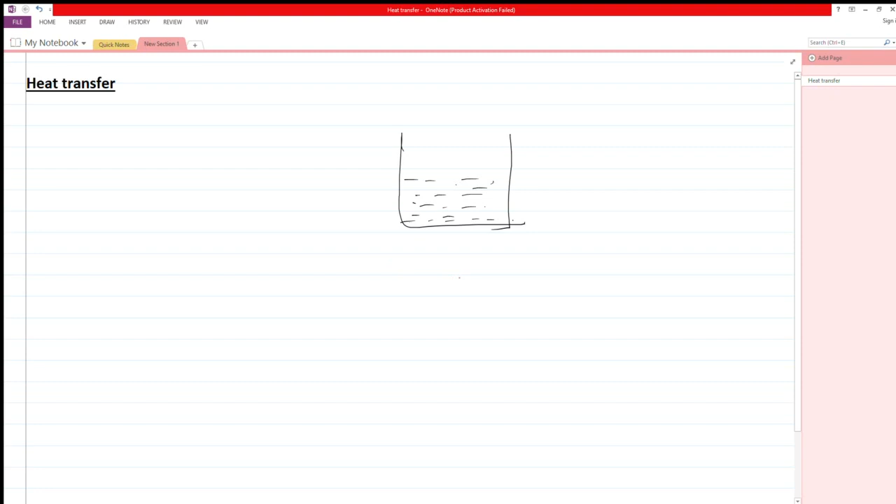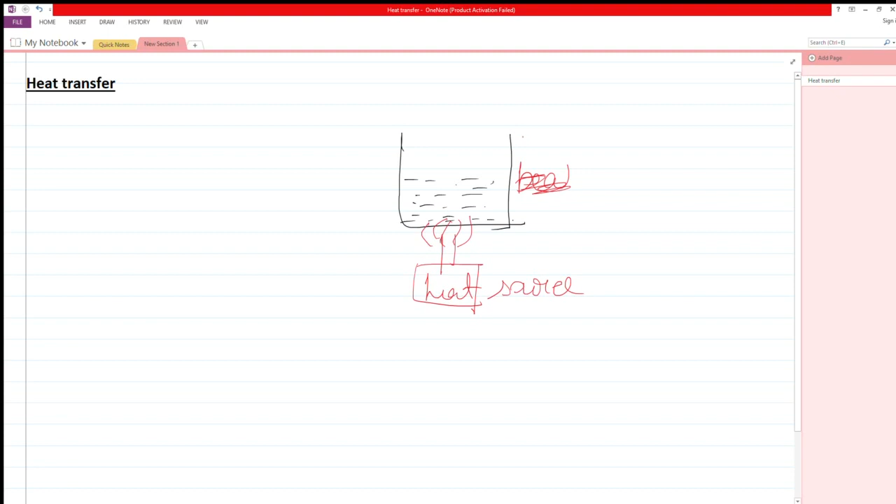And now some flame is there, some heating source we are providing, some flame is coming, some heating source we are providing. This is a heating source, and this is a beaker. Anything you can call it, a container. एक कंटेनर आपने ले लिया और इसके अंदर ये जो है वाटर फिल्ड है.

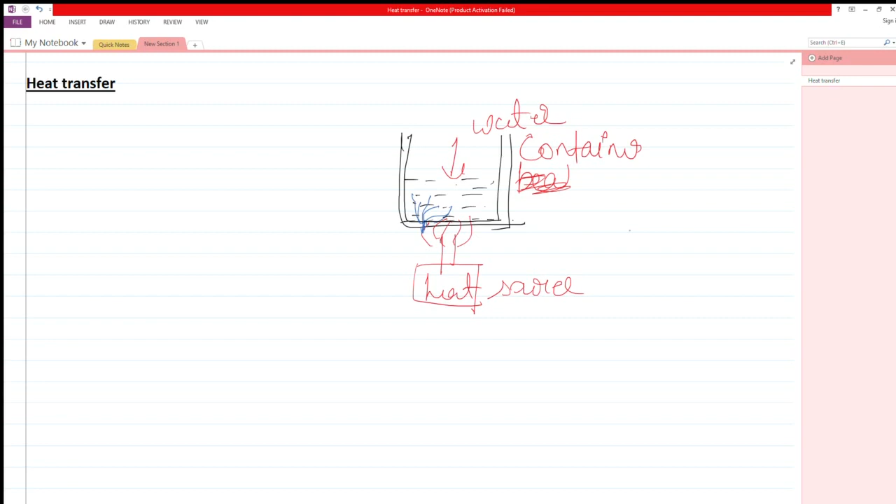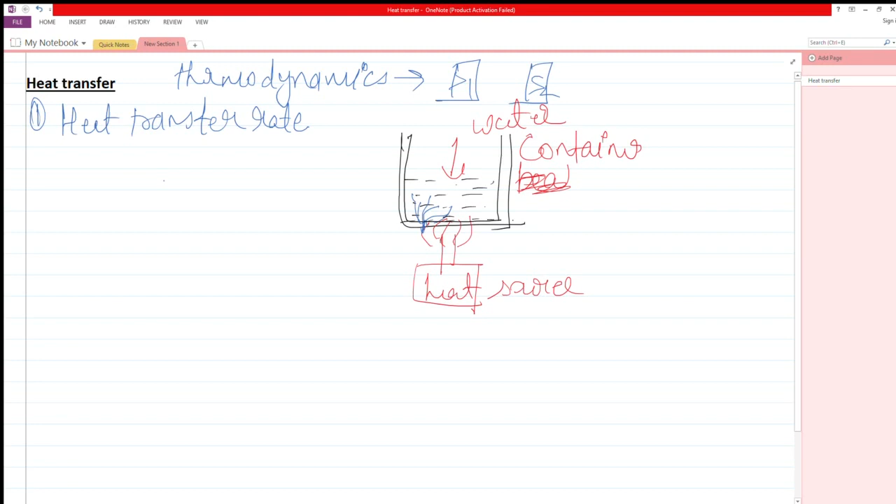Heat transfer rate. The word heat you have already studied previously in a subject called thermodynamics. Thermodynamics में भी आपने heat को पढ़ा है. In that subject you used to study what is heat and how much amount of heat is being transferred from one system to another system, from system 1 to system 2, or from system to surrounding. But now in the case of heat transfer subject, you will be studying at what rate the heat transfer is taking place. So this is the basic difference between the heat transfer and the thermodynamics.

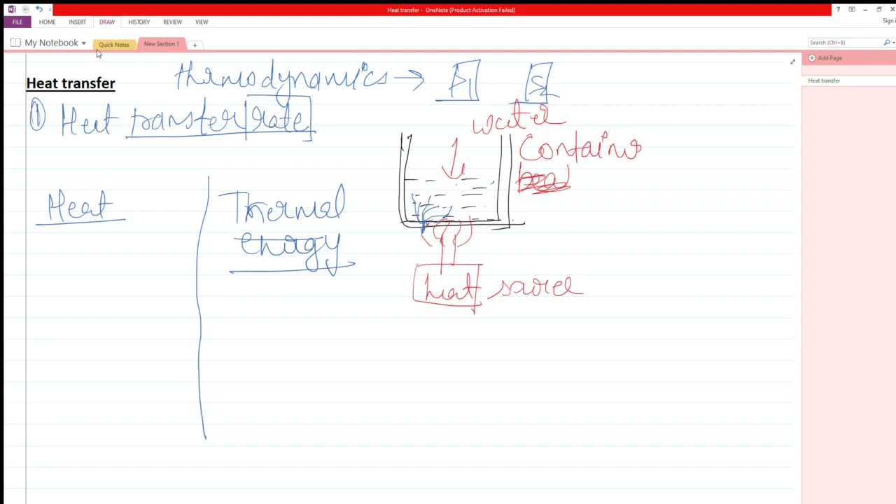So starting with the heat transfer, you are already concerned with the heat. There is a basic difference between the heat and thermal energy. If I say heat and then if I say thermal energy, there is a difference between heat and thermal energy. If I talk about the difference, the first and the foremost difference is thermal energy is energy due to randomization.

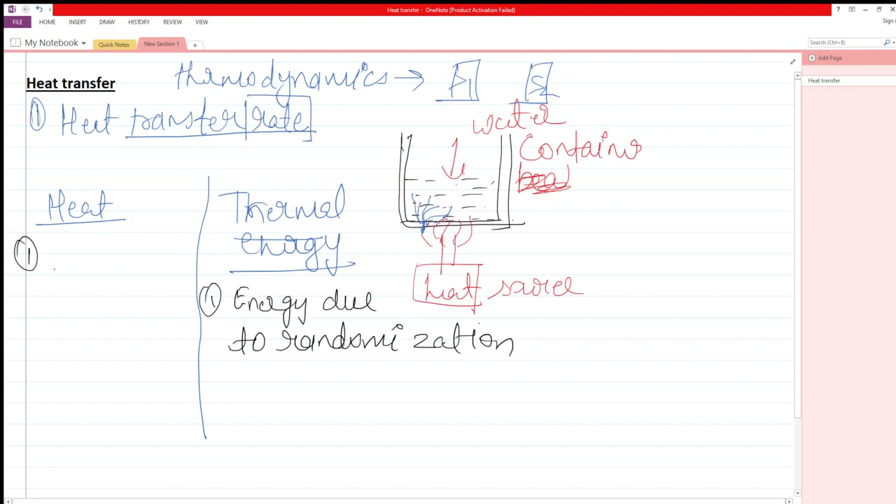This thermal energy is in transfer, in that case it will be considered as heat. So the term heat is of prime importance when we talk about the transfer of heat.

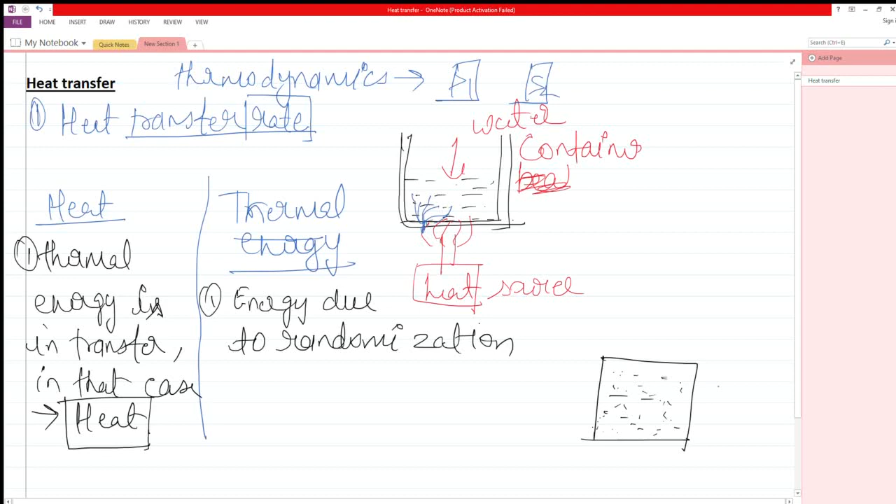For example, I am having a container and it is filled with some gas. It is having some temp, इसका कुछ टेम्परेचर है, लेट्स से इसका टेम्परेचर है 100 डिग्री सेल्सियस.

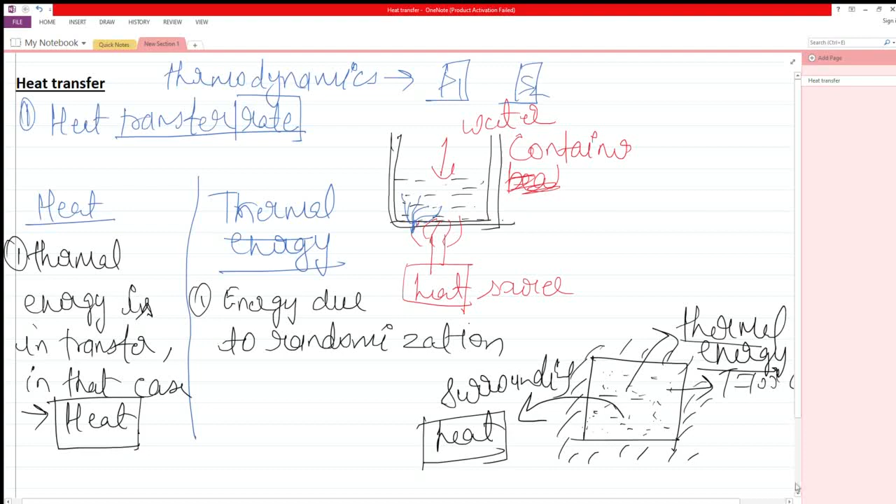Sorry, this will be heat. This thermal energy will be heat. Okay, let me draw it. So this is the basic difference between the heat and thermal energy. Moving on to the next topic. So till now we have understood what is heat and what is thermal energy. What is heat transfer? The movement of heat from one place to another place is heat transfer.

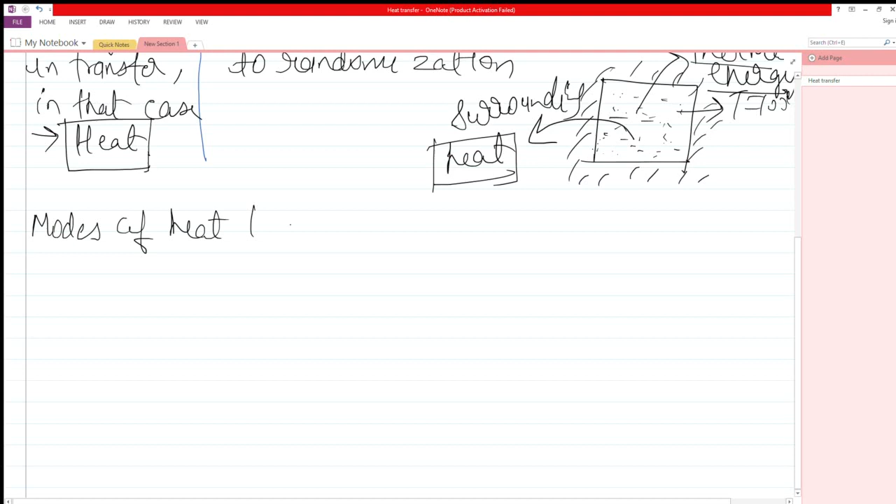Now let us talk about the different modes through which the heat transfer takes place. Modes of heat transfer. This is very important to understand. Basically, there are three modes of heat transfer.

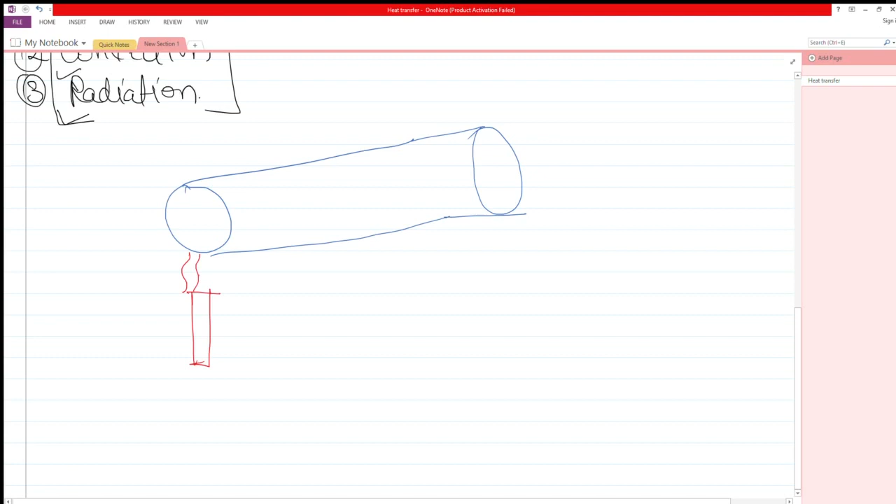Now any one of us can easily understand from our day to day understanding, we can easily understand कि जो हीट है, ये जो रॉड का लेफ्ट एंड है, इट विल गेट हीट.

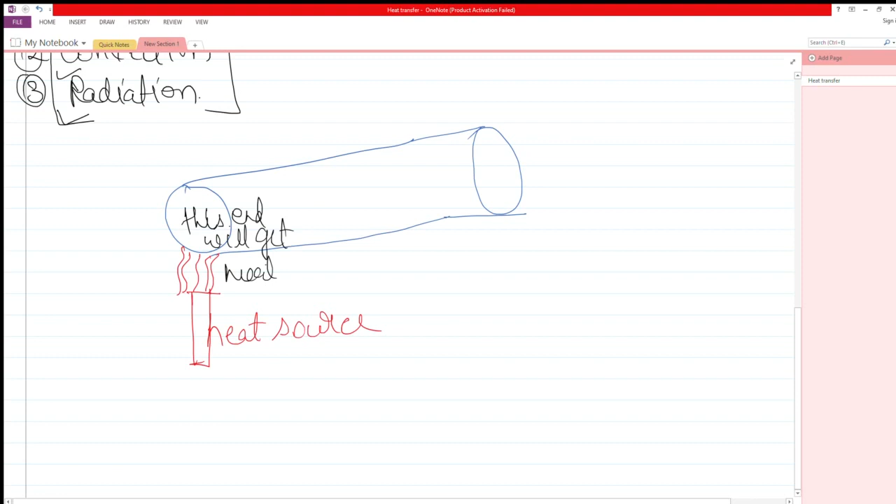इसका टेम्परेचर बढ़ जाएगा. This end will get heated. And we know from our basic understanding that ये जो रॉड का एंड है वो धीमे धीमे जो हीट आगे ट्रांसफर होती जाएगी और after some time the whole rod will get heated and the heat will travel to this next end.

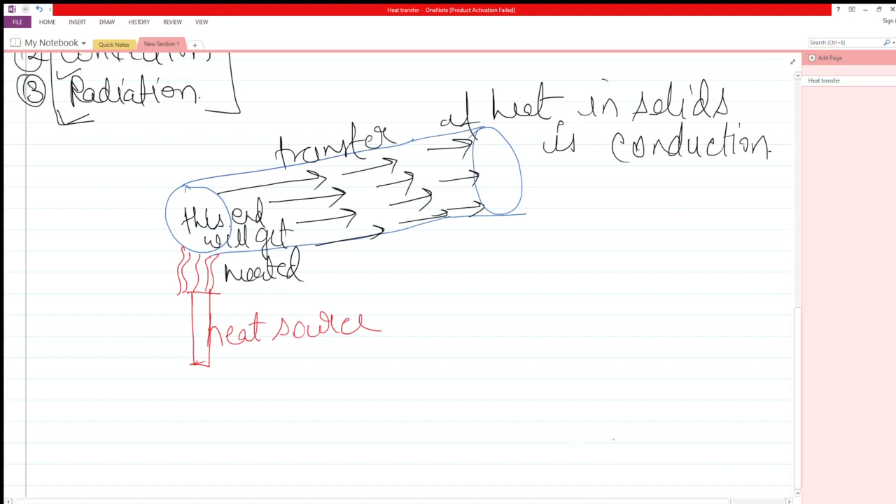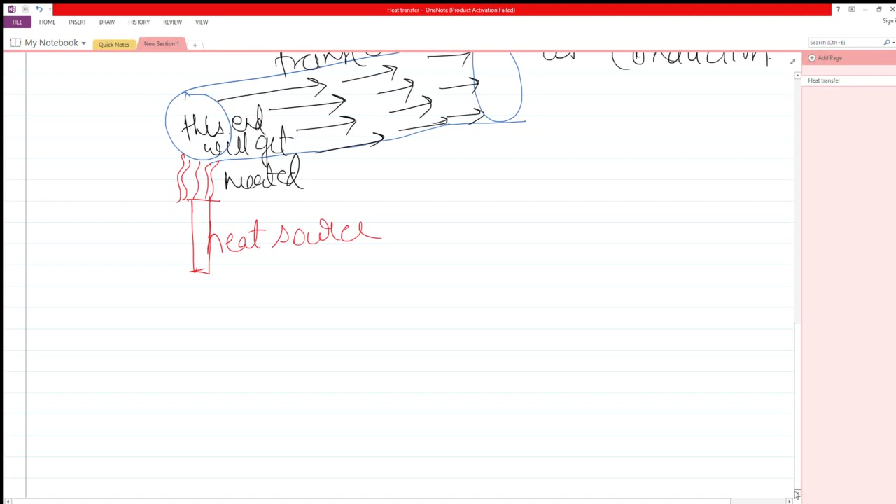Let us see it again. We have a rod. One end of the rod is subjected to certain kind of heat. The heat is getting conducted from one end of the rod to the next end. How it is happening, that is what we have to study. Let me again draw this rod.

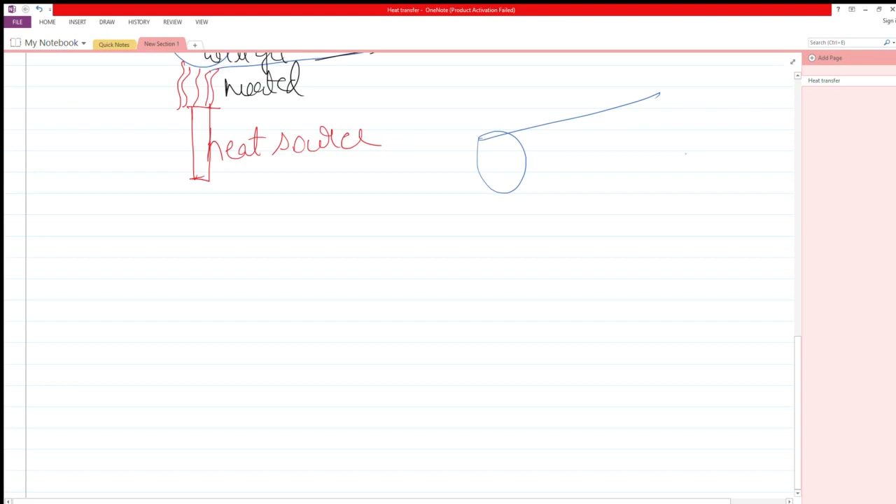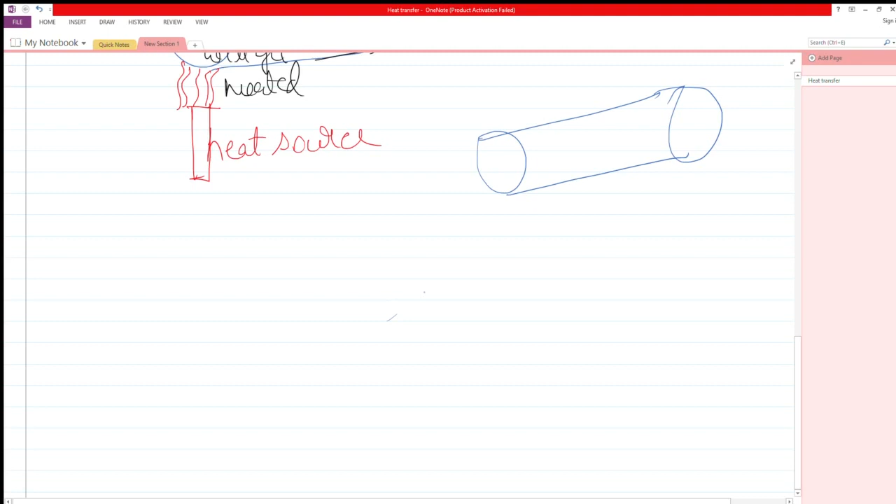So this is the rod. So this is the cylinder we have. Let us say there is some heating source. Some heating source is there and it is being heated at one end. Since it is a metal conductor, ये एक metal rod है. This is a metal rod.

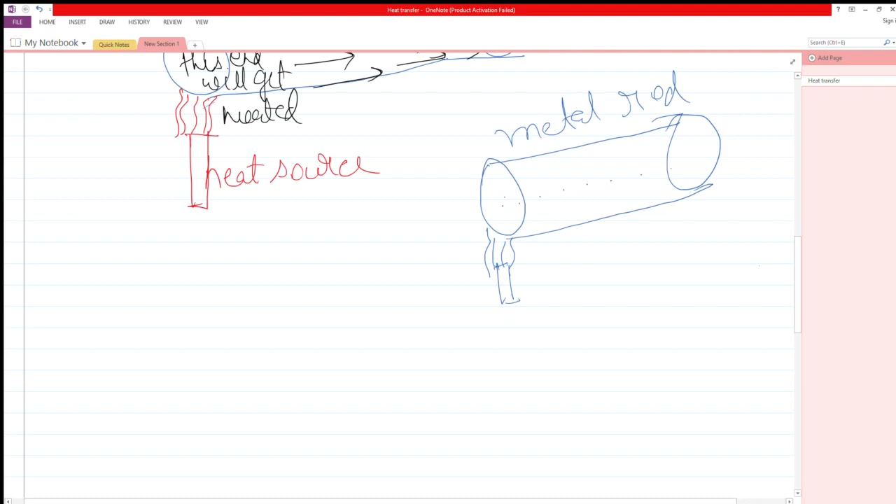In the metal there are certain free electrons available. So these free electrons will start vibrating when they get heat from the heat source, and these vibrations are transferred from one electron to another electron, from second electron to third, third to fourth, and fourth to fifth. This is how the vibrational energy of the free electrons will keep on transmitting from one place to another place, and this is how the heat transfer will take place because of free electrons. So one cause for the heat transfer to take place is free electrons.

Second is the metals. All the metals have certain lattice arrangement in them, and these molecular lattices start vibrating when they receive heat, and because of the vibration of one molecular lattice, another molecular lattice in the surrounding will also start vibrating. Let's say there is one molecular lattice, a second, third, and continuously. If the vibration of one lattice starts, this vibration is transferred to another lattice, and then to another, and then to another. This kind of transfer of the vibration of the molecular lattice is called molecular vibrational energy transfer. Because of this transfer, the thermal energy, that is heat, is also transferred from one place to another place.

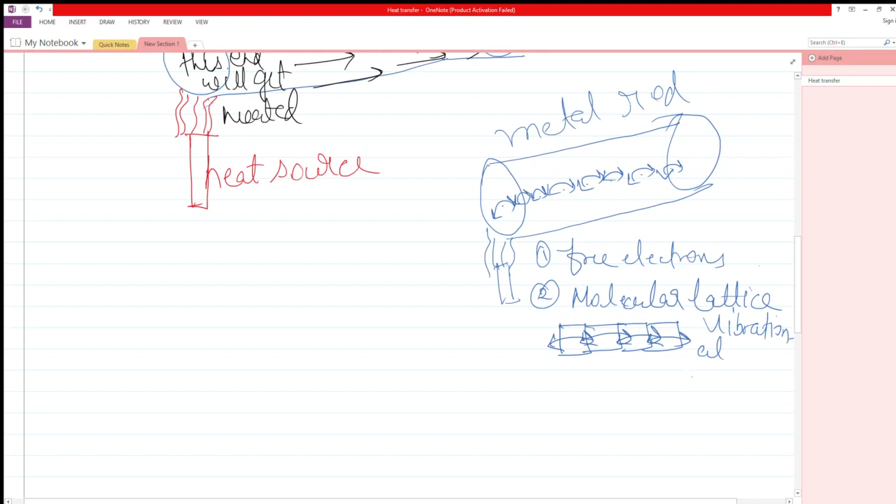Therefore, another cause of heat transfer to take place in conduction is molecular lattice vibrational energy transfer. Molecular lattice vibrational energy transfer. Now, out of the total energy transfer in conduction, 70% of the heat transfer takes place because of free electrons, while 30% takes place because of molecular lattice vibrational energy transfer.

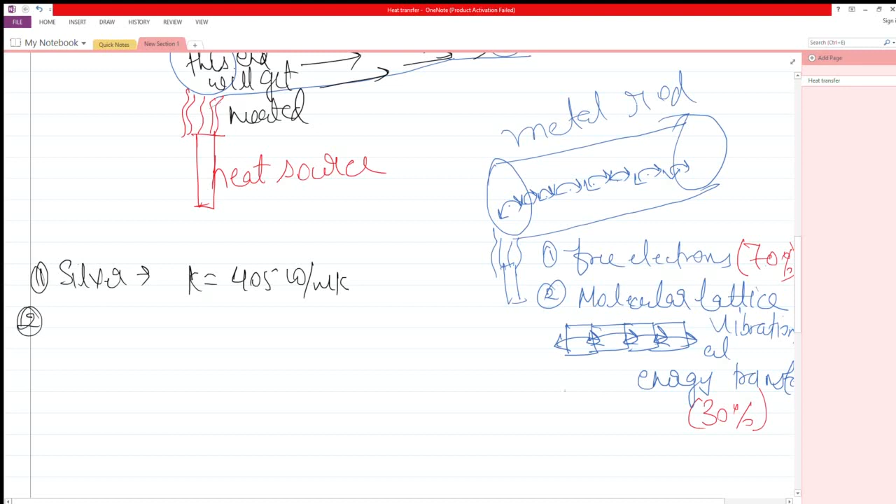So now we have understood what is thermal conduction and how it takes place. Let us now see certain known thermal conductors and their conductivity. First is silver. Thermal conductivity of silver is 405 watt per meter Kelvin. This is the best known metal thermal conductor. Second one is copper, thermal conductivity 385 watt per meter Kelvin. Third one is gold, thermal conductivity 319 watt per meter Kelvin. And fourth one is aluminium. Thermal conductivity इसकी होगी 200 watt per meter Kelvin.

Aluminium is the most prominently used metal thermal conductor in engineering applications because of its weight, its availability, its cost, and its thermal conductivity. It is the most prominently used thermal conductor in engineering applications.

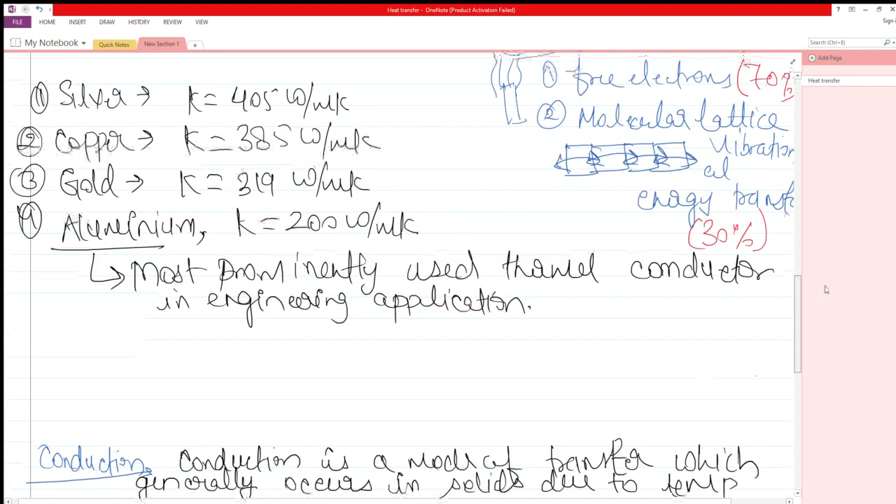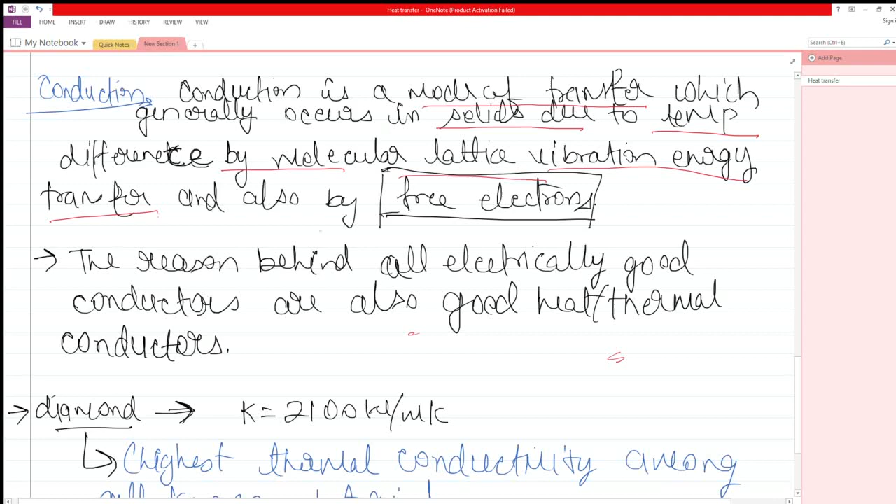Now, till now we have understood what is conduction. So we can define conduction as a mode of heat transfer, I have already written this definition, which generally occurs in solids due to temperature difference by molecular vibrational energy transfer. This is one cause, and also by free electrons. This is another cause.

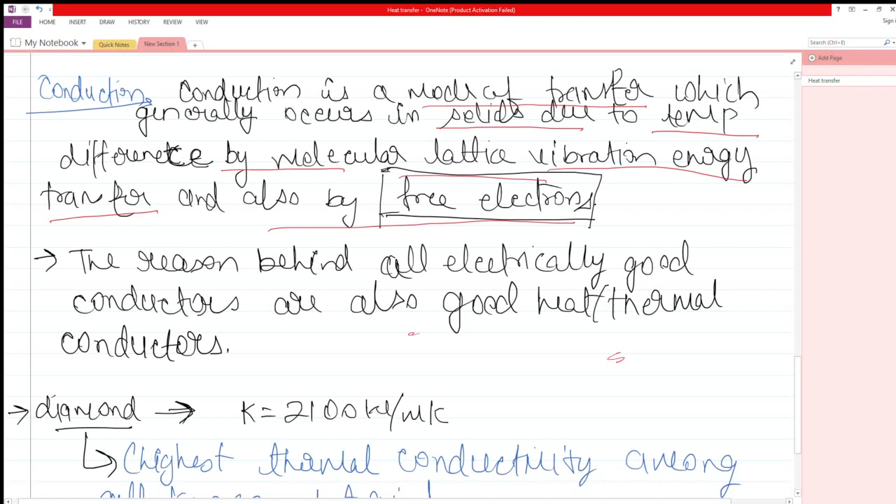All the electrically good conductors are also good heat conductors. जितने भी अच्छे electrical conductors होते हैं, they are also good thermal conductors. This is because of the availability of free electrons in such substances, such materials.

There are certain non-metals also that have very high thermal conductivity. The example is diamond. Diamond has high thermal conductivity because of the second cause of thermal conduction, that is molecular lattice vibrational energy transfer. There is a very high rate of heat transfer because of the perfect molecular lattice arrangement in diamond, and because of this, molecular lattice vibrational energy transfer is very fast in diamond. Therefore, diamonds have very high thermal conductivity, that is 2100 watt per meter Kelvin, because of the perfect lattice arrangement.

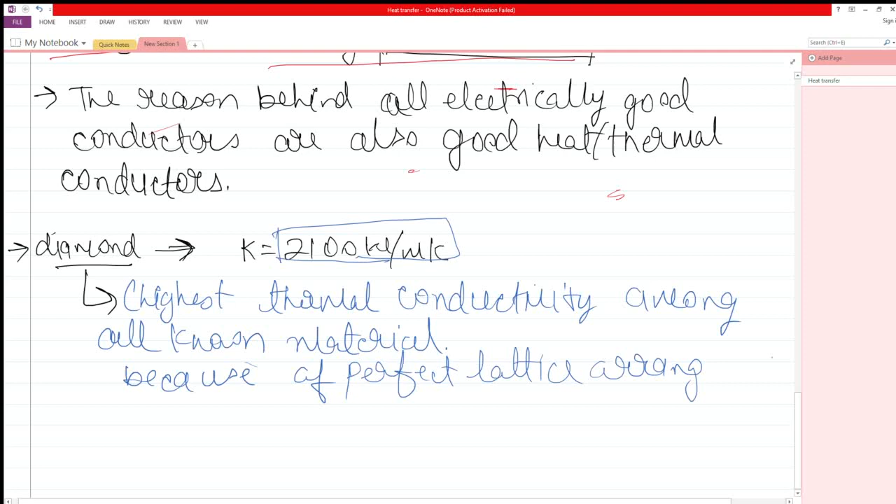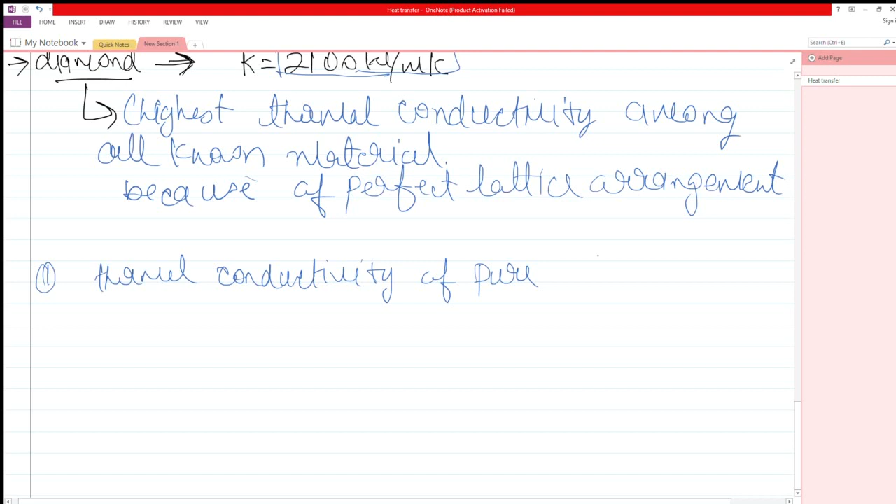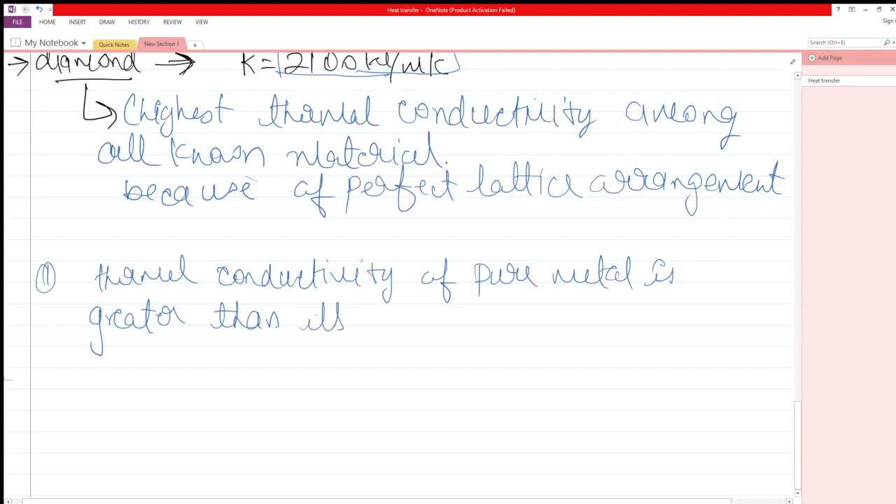Perfect lattice arrangement. Till now, we have understood what is conduction. There is one more point regarding the thermal conductivity. First thing is, thermal conductivity of pure metal is always greater than its alloy. Thermal conductivity of pure metal is greater than its alloy. For example, thermal conductivity of copper is higher than the thermal conductivity of brass.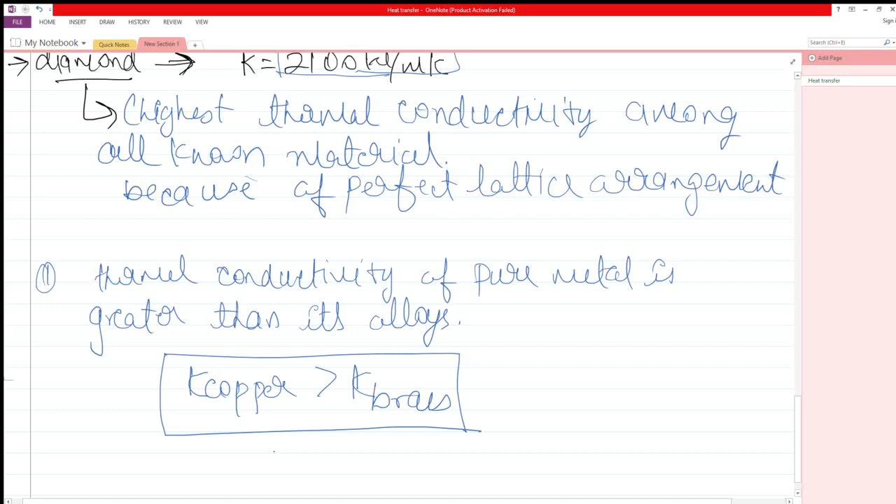Now we will see one more thing, that conduction is there in the gases also. Yes, gases also do conduct heat. Therefore, the conduction in gases we'll see. Next topic is conduction in gases. Conduction in solids we have seen. Conduction in gases, now we will study. Try to understand.

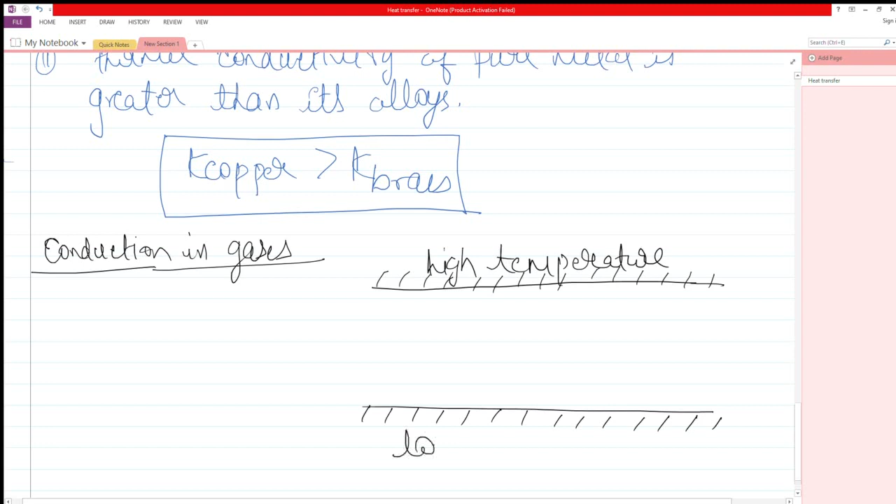For example, let us consider there are two plates, two walls. One is at high temperature and one is at low temperature. Let's say this is the high temperature wall and this is the low temperature wall. And between these two walls there is gas that has been filled.

Now, from kinetic theory of gases, we know that the gas that is at higher temperature will possess the higher molecular momentum. The molecules of the gases will be having higher velocity at the higher temperature, while the molecules of gases kept at low temperature will be having a lower momentum, lower velocity.

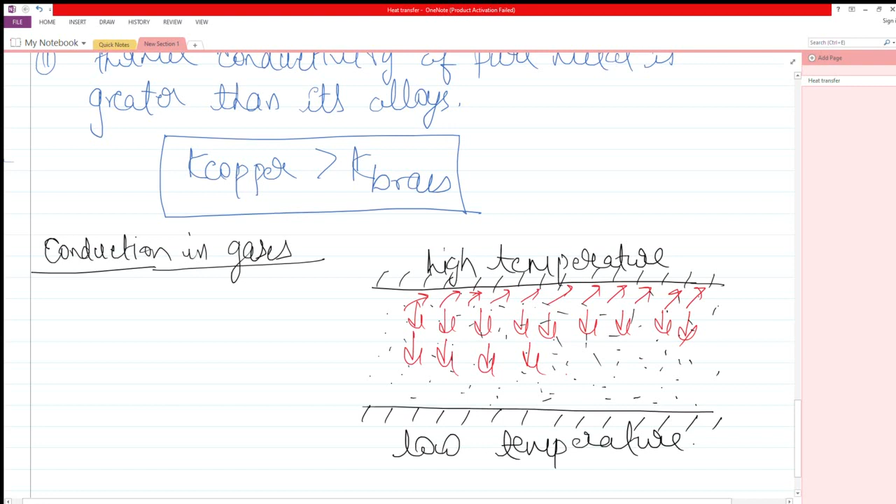Therefore, when the gas comes in contact with the high temperature wall, the molecules of that gas will possess higher momentum and their velocity increases. Because of higher momentum, these molecules collide with other molecules of the gas, and molecular momentum transfer takes place from one plate to another, that is from high temperature side to the low temperature side. This is how conduction takes place in gases.

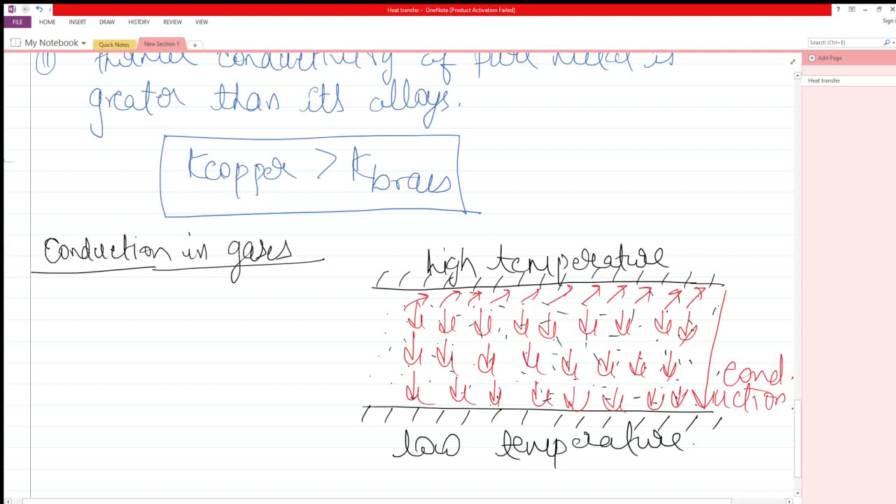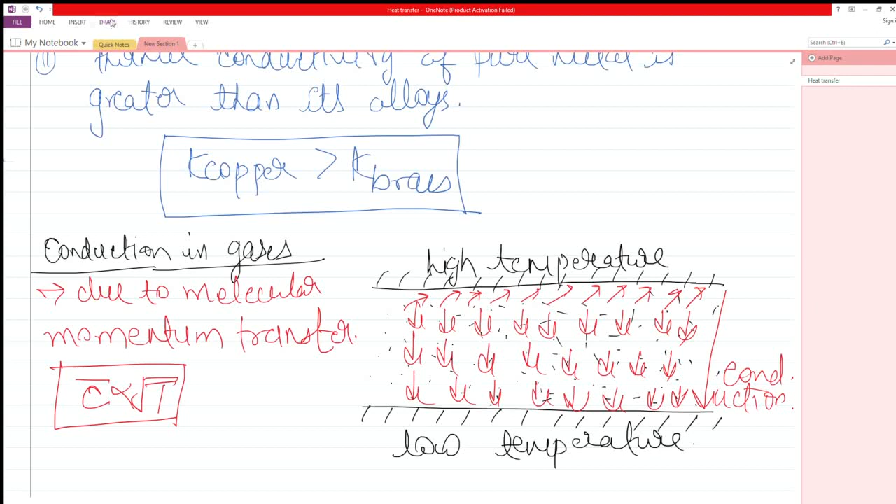Therefore, conduction in gases takes place due to molecular momentum transfer. Root mean square velocity of the molecules of gases is directly proportional to the under root of absolute temperature T of the gas. Therefore, as the temperature increases, the velocity also increases. This is what we have seen here in conduction in gases.

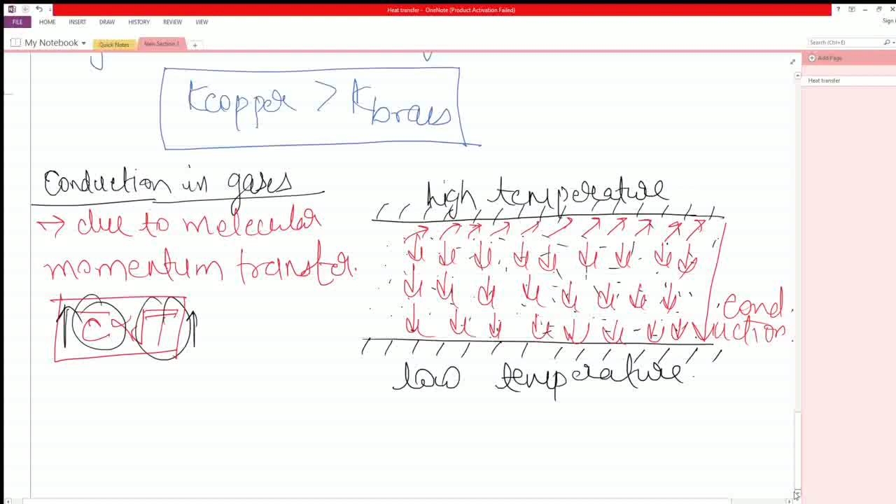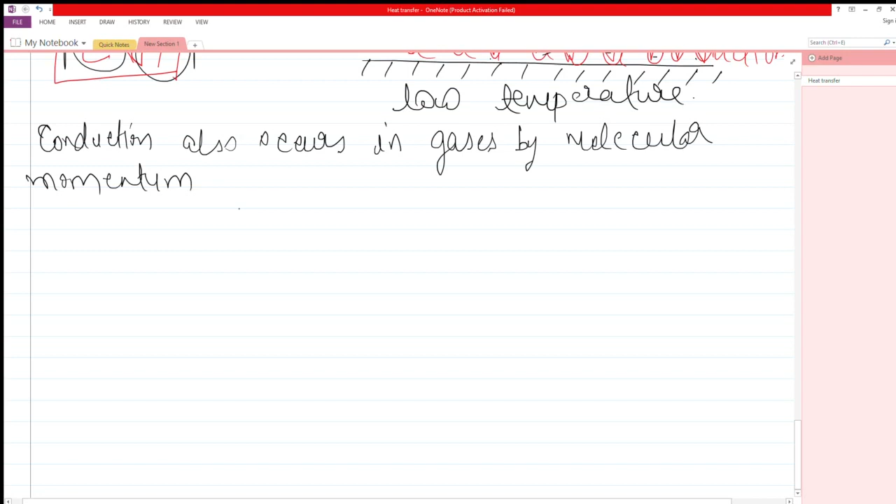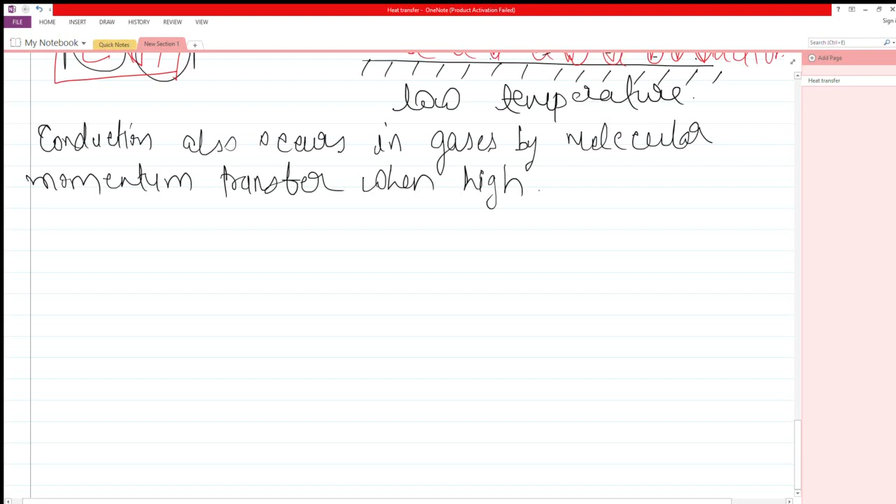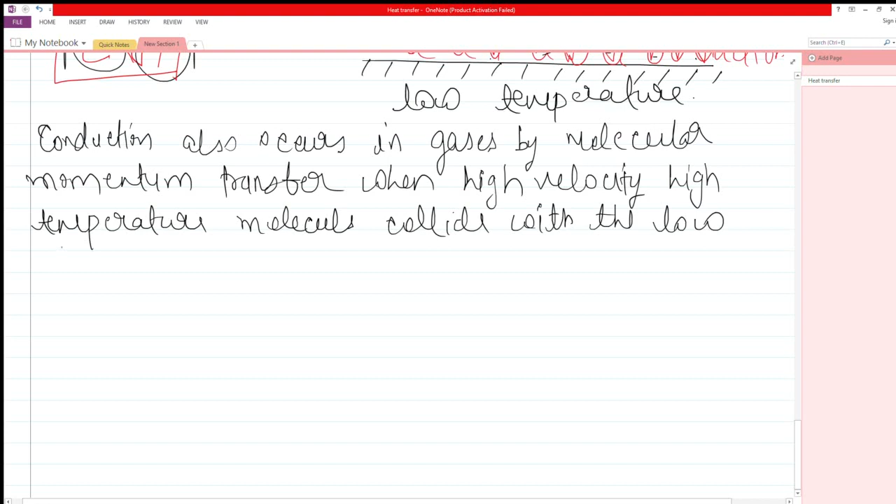Let us now write about this conduction. Conduction also occurs in gases by molecular momentum transfer, when high velocity, high temperature molecules collide with the low velocity, low temperature molecules.

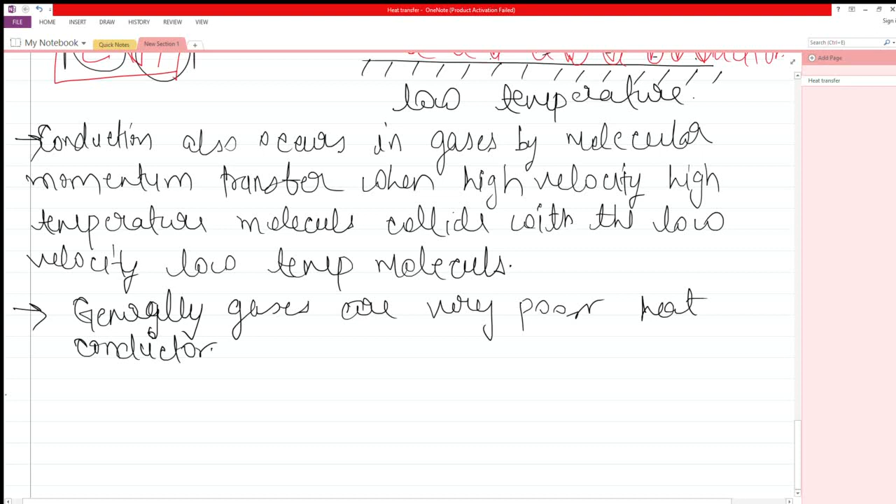Generally, gases are very poor heat conductors. Now, if we talk about the thermal conductivity of air, it is 0.026 watt per meter Kelvin, which is very low. If we compare liquids with gases, liquids are better heat conductors.

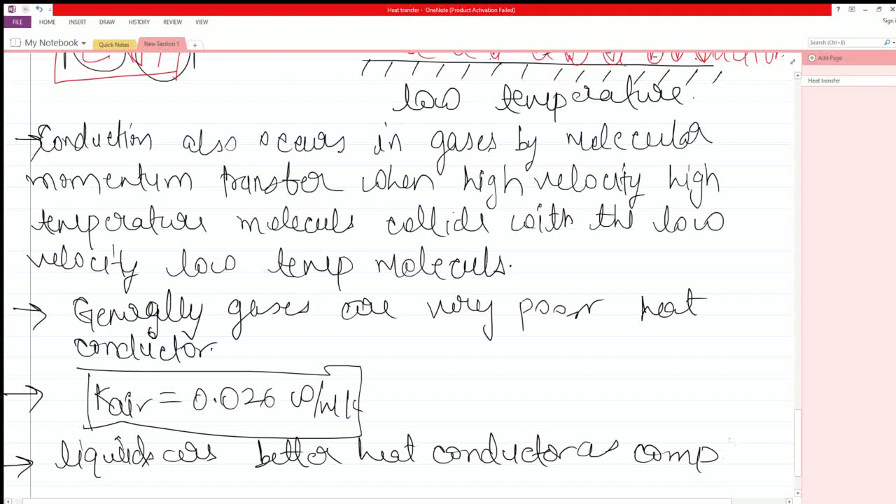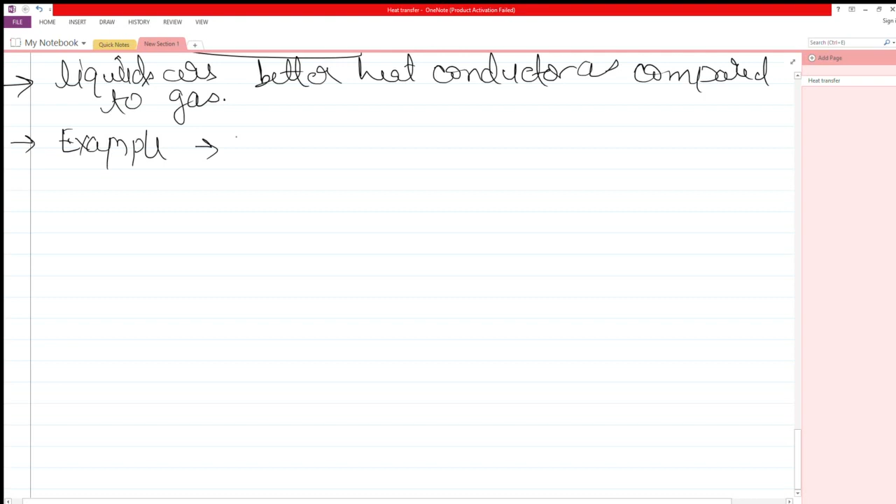Liquids are better heat conductors as compared to gases. Example is water. The thermal conductivity of water is 0.61 watt per meter Kelvin, while thermal conductivity of air, we have just seen, is 0.026 watt per meter Kelvin.

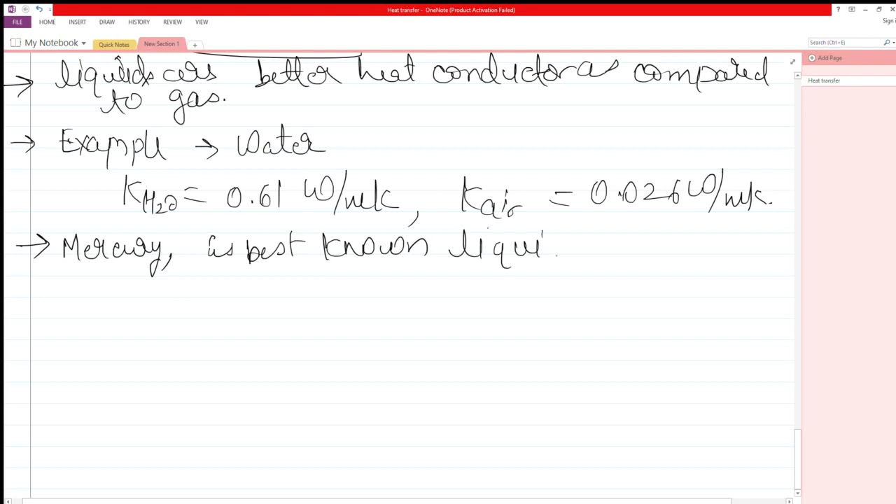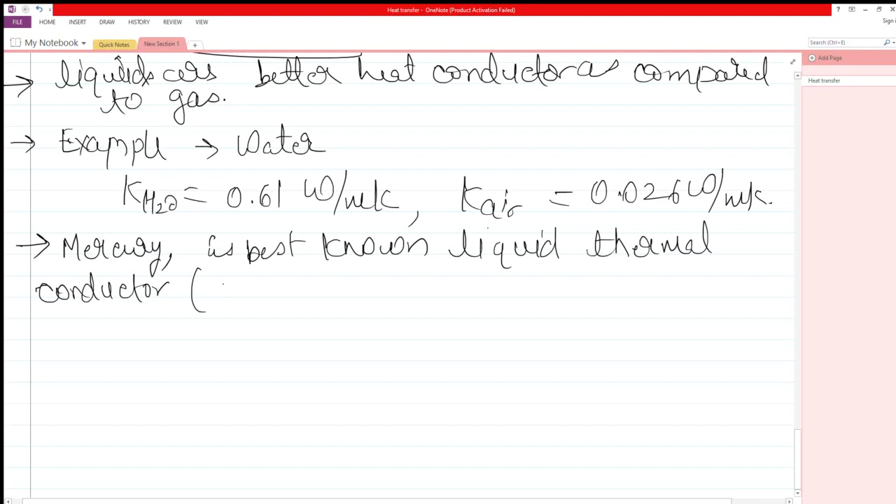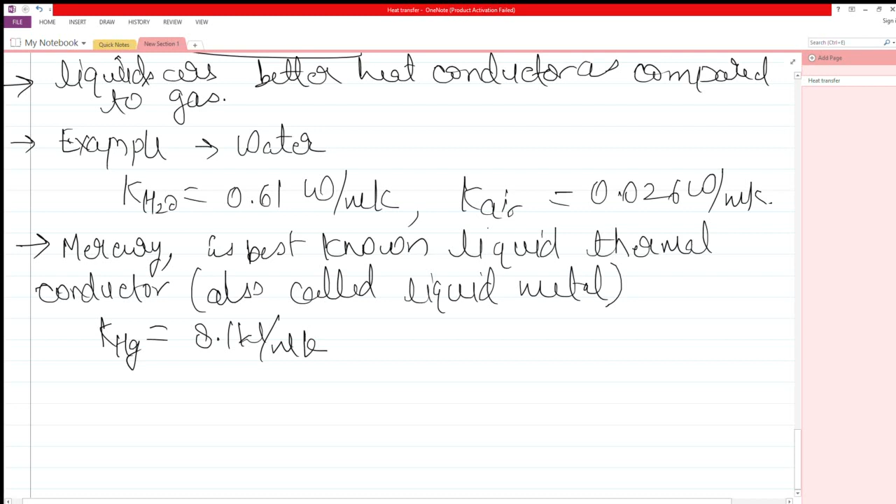Among liquids, the best known thermal conductor is mercury. Its thermal conductivity is so high that it is also called liquid metal. Mercury is the best known liquid thermal conductor, also called liquid metal. Thermal conductivity of mercury is 8.1 watt per meter Kelvin, which is highest among all liquids.

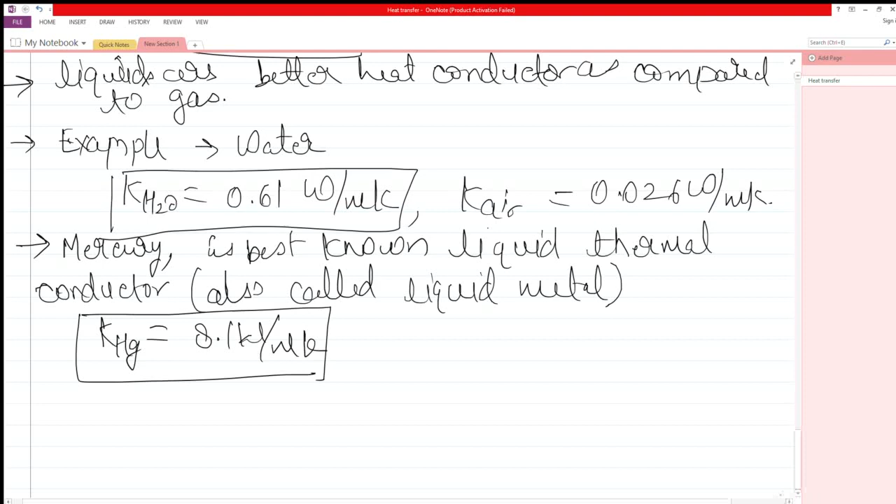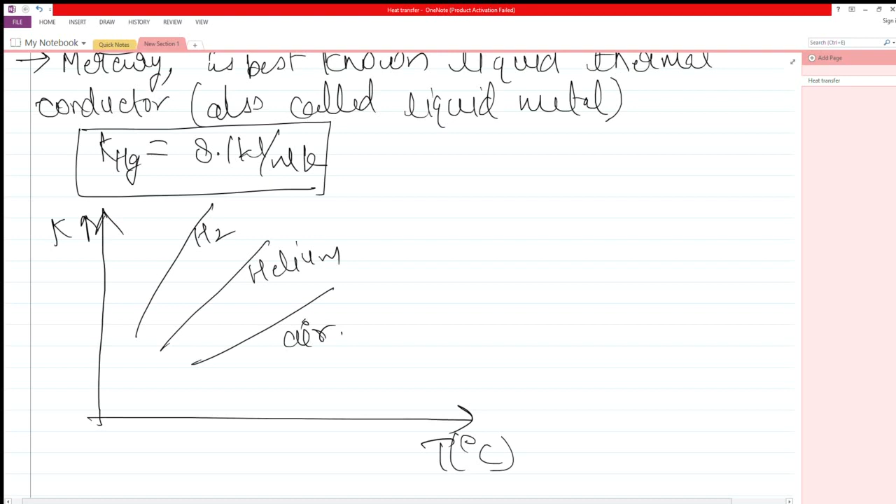So this is the end of this lecture on conduction. In the next lecture, we will understand the topic of convection. Thank you.